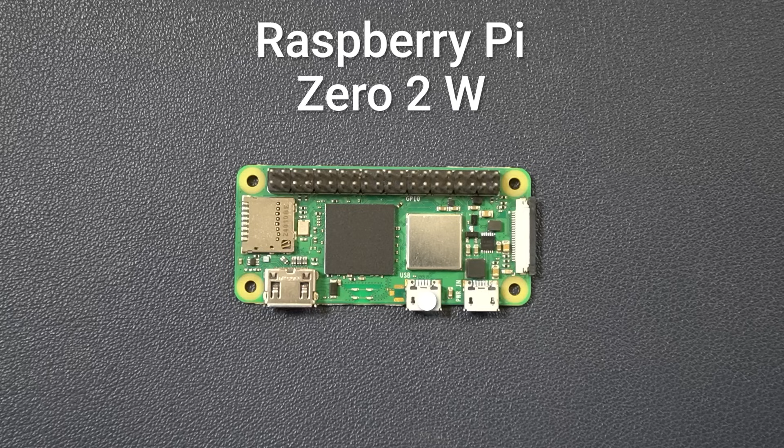To control the Stream Deck and process commands, we'll need some brains. And we'll get that in the form of a Raspberry Pi Zero 2 W. The Raspberry Pi is a tiny computer that runs an operating system called Linux. It provides us with the USB interface needed to connect the Stream Deck module, a Wi-Fi chip to make our project wireless, and a CPU that is capable enough to handle all of the processing we will need to do.

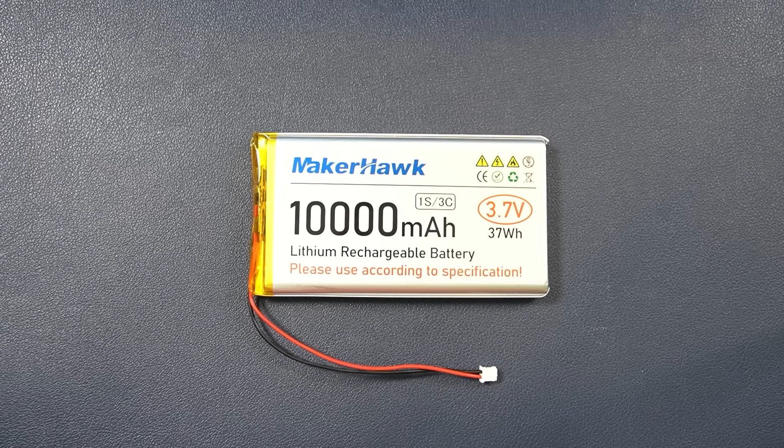Next, we need to power our project. For this, I've chosen this 10,000 milliamp hour LiPo battery. A battery of this size should provide several hours of runtime on a single charge. A couple of things to note. The battery comes with a JST PH 2.0 connector. We will be using this connector as it's quite easy to short out the battery if we try soldering it directly to our controller board.

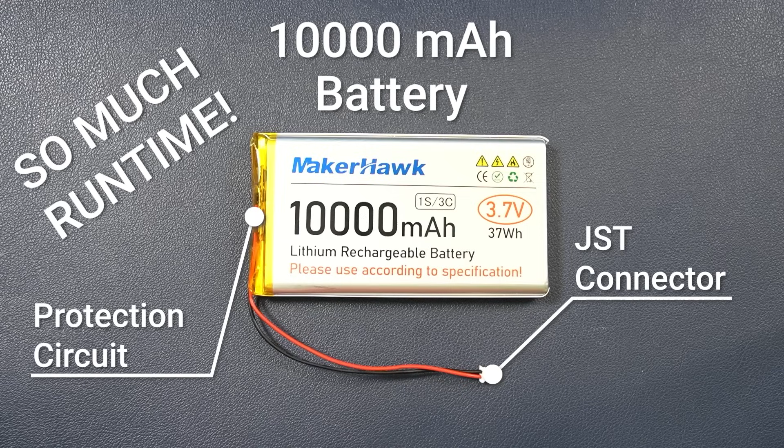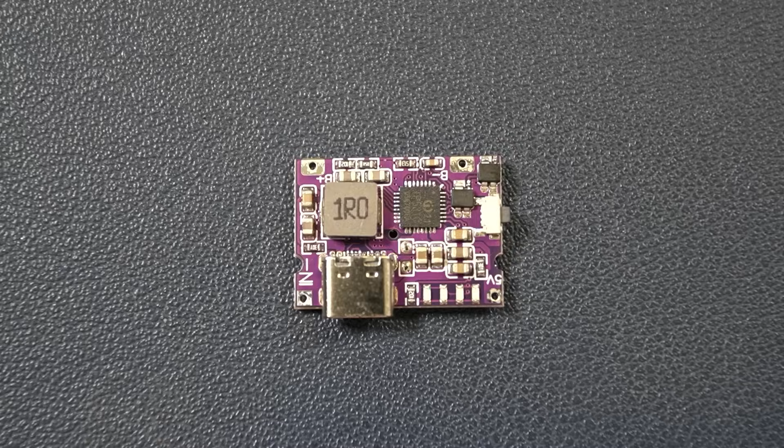Additionally, this battery has a built-in undervoltage and overcurrent protection circuit, which will be required due to our design. More on that later. Unfortunately, the Raspberry Pi can't charge a battery on its own, and so we will need this tiny battery charging board. This charger module is a 3.1 amp charger and can even convert the battery's 3.7 volt output to the 5 volts required by the Raspberry Pi.

However, when the charging plug is inserted or removed, there is a brief cut of power output, which will cause the Pi to turn off.

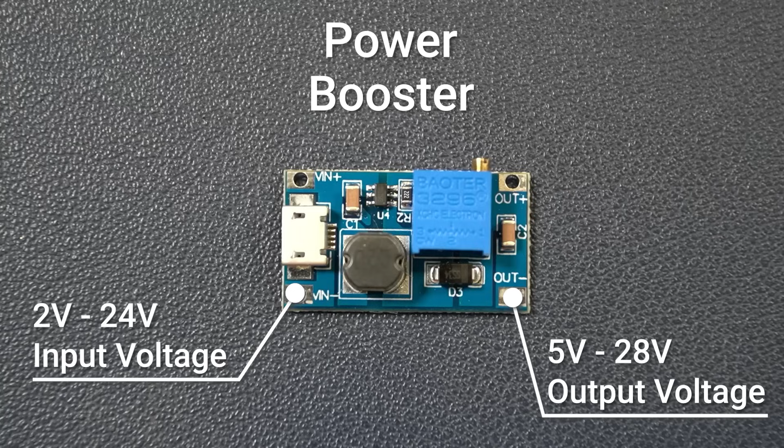Thus, to work around this issue, we will attach a power booster to the battery output to deliver 5 volts to the Pi. The power booster takes as input 2 to 24 volts and outputs an adjustable 5 to 28 volts. It has a small set screw that allows adjusting the output voltage. Note that wiring this power booster directly to the battery skips the charging board's protection circuits. Thus, it's important to use a battery that has built-in protection, like the battery we've chosen for this project.

Finally, to connect everything together, we will need a few other items. To connect all of our power providing components, we'll need some JST PH 2.0 male and female pigtails. We'll also need a USB-C to micro USB cable for testing, and depending on the size and layout of your enclosure, a USB-C to USB-A cable. Finally, we'll need some Kapton tape to hold things in place and to insulate some areas to prevent shorts. And that's it for our parts list. In addition to these parts, you'll also want a soldering iron and solder, side cutters, and a way to strip the wires.

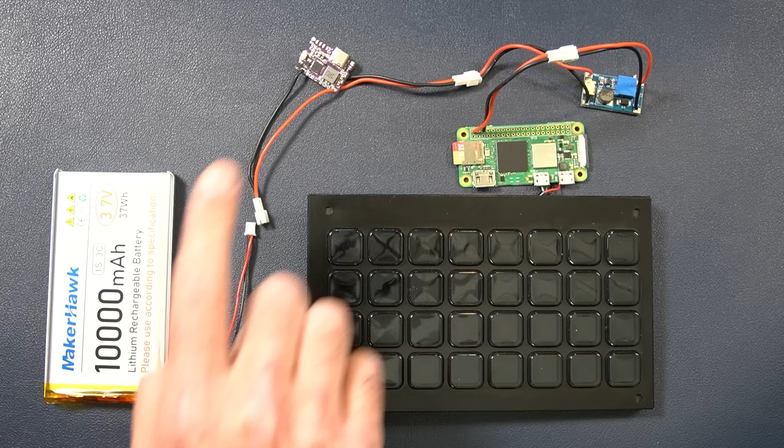And here is the final assembled circuit. We run the battery to the power board. We then go from the same pads on the power board to our booster. Note that I used a multimeter on the booster's output pads and adjusted the set screw to ensure we're providing exactly 5 volts to the Raspberry Pi. We then route from the booster board to the 5-volt and ground pins on the Raspberry Pi.

And finally, we provide a micro USB connection to our Stream Deck. In this case, I've soldered my USB cable directly from the pads on the bottom of the Pi to the Stream Deck. This is to give myself more space when I build an enclosure.

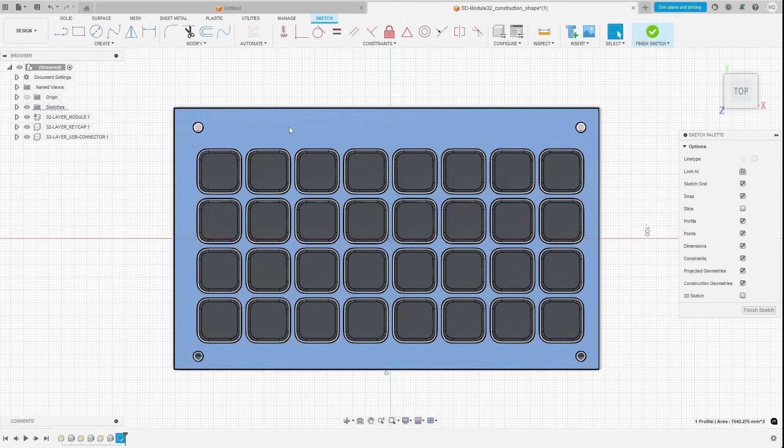A model was created in Fusion, which then was 3D printed for the Stream Deck case. I started off using the drawing files provided by Elgato of the module to determine the hole locations and size of the module. The Stream Deck module has 4 holes in the corners, and these were used as registration posts to keep the module in place in the case.

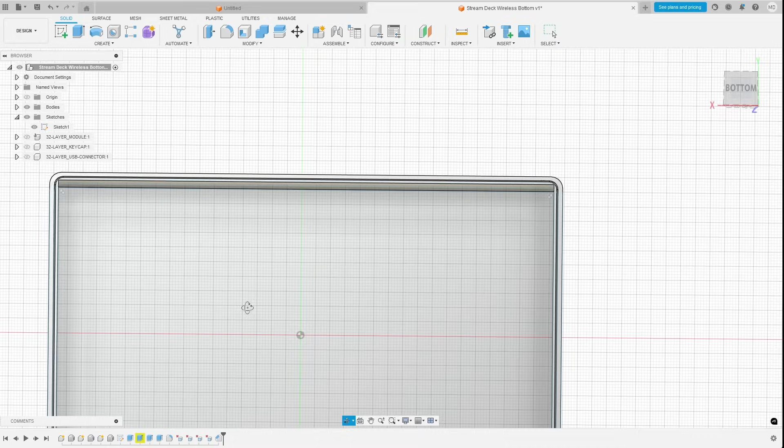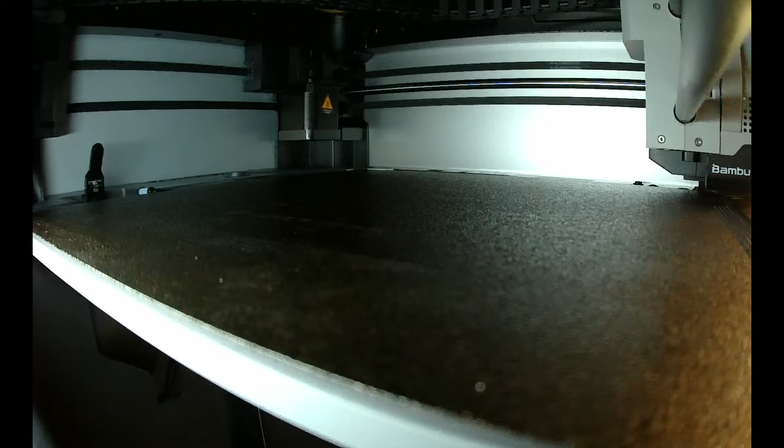For the bottom half, compartments were made to hold both the battery and the charging board. Additionally, a hole was cut in the side of the case for the USB-C charging port. After completing the 2 models, they were sent off to the 3D printer. I plan on creating another video detailing how the case was designed and printed.

Before you go cramming all of the components into your new 3D printed enclosure, you'll want to install the Raspberry Pi operating system on a micro SD card and place that card in the Pi. The process is made easy by the Raspberry Pi folks, so let me walk you through it. First, you want to go to the Raspberry Pi software website. I'll leave a link in the description.